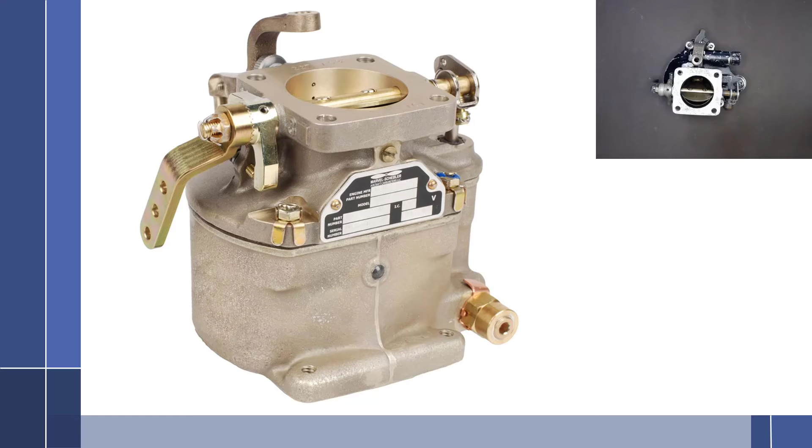In this video, I'm going to cover the Marvel Schebler MA-4SPA carburetor. This particular carburetor has the accelerator system as well as a manual mixture control, which all Marvel Scheblers do.

So let's get started. With any carburetor system, we can usually divide it up into two different circuits: the idle circuit and the off-idle, or sometimes called the main circuit.

So what we're going to do is start with the main circuit on this carburetor and go through all of the steps that fuel and air will take to get to the engine. So let's start at the beginning.

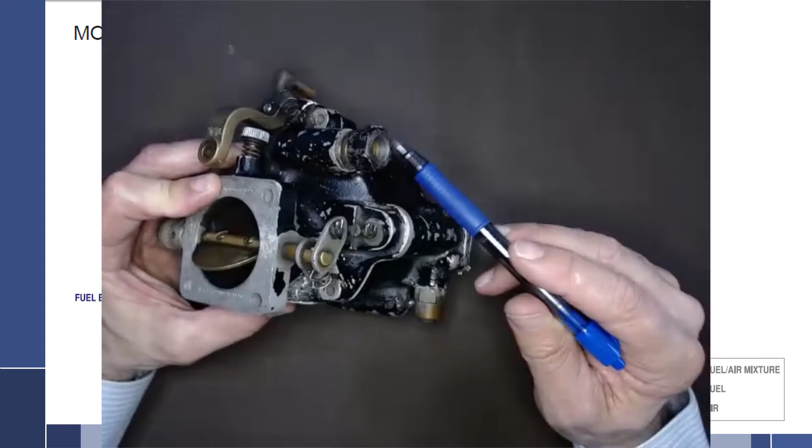Looking at the carburetor, fuel is going to come in through the inlet right here. Now on the inlet side, we notice there is a screen, a rather beat-up screen, but it's a screen nonetheless. Consider the fact that fuel is going to come this way, so any debris that the screen is actually filtering out will be on the inside. It will not be on the outside.

Now this screen is something that I would like to take a look at, clean and inspect at least every annual inspection or every 100-hour inspection. I would not let it go much longer than that.

Funny story, sometimes I'll ask students how often would you check that, and they'll say every overhaul. Well, that would be every 2,000 hours, or should be 12 years. But anyway, back to the carburetor.

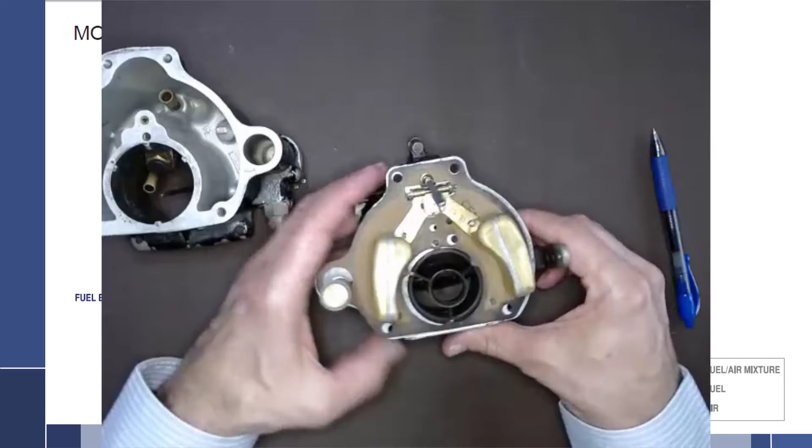So fuel is going to come through the inlet through this tube right here. Let's take the carburetor apart so we can now take a look at the inside of what is happening. So once it goes through this passageway, it is going to come to a needle and seat. I'm going to pull that apart here so we can take a look at it.

Remove the gasket, we'll set that out of the way. Here we have a needle and the seat down in here. So what happens as fuel enters in through the needle and seat, it will fill up the fuel bowl.

And when the fuel bowl fills to a very specific point, these floats, now it's upside down of course, will raise up until the needle closes off fuel coming in, and then the fuel will find its height.

The height of the fuel is a very specific and important level. The reason why it's specific and important, if we look at the drawing here, you will look at this fuel line and notice that this is where the fuel should be, and it comes to a certain point on the discharge nozzle.

So looking back at the carburetor, we can see here's the discharge nozzle, and the fuel needs to be at a certain height.

If the fuel is too high, then it is too close to the discharge end, and the carburetor will run very rich because more fuel is being drawn out than should be drawn out. If the fuel level is too low, then the carburetor is going to be lean.

It's going to run lean because the engine is not going to get as much fuel drawn out of this discharge nozzle that it should be. The venturi, I should say, will not draw as much as it should. And we'll cover that in just a second.

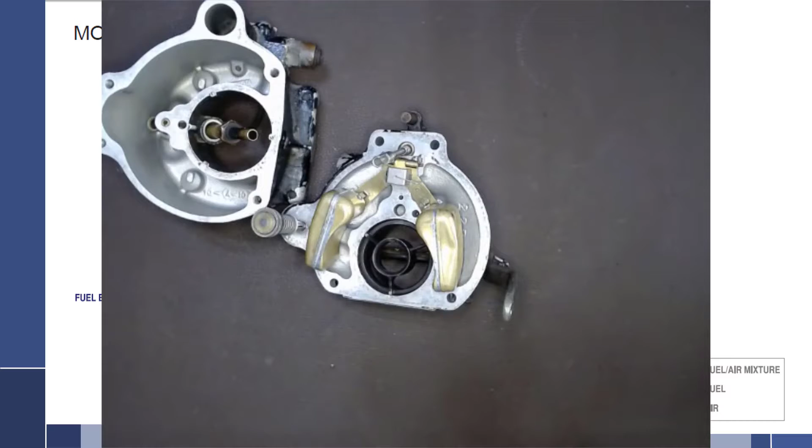Now let's talk about what is actually drawing fuel out of the discharge nozzle. Looking at the drawing over here, this is an updraft carburetor, which means air comes from the bottom of the carburetor up into the engine. In this particular carburetor, we have a series of venturis, a primary and a secondary venturi. We'll take a look at them over here on this half of the carburetor. It's actually one piece, but we name it that way.

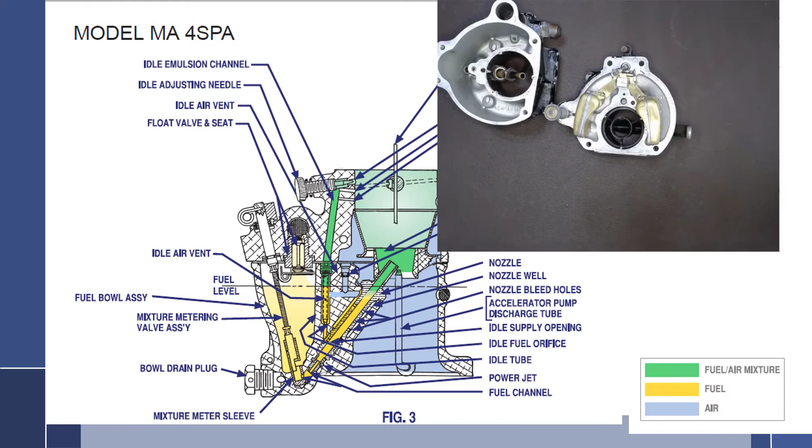The engine up here is running, and as the pistons draw back on the intake stroke, it draws in a rather large amount of air, and drawing in that air causes air to be drawn up through the carburetor, across the venturi, and into the engine. So the engine is sucking up the air right there.

Now, as the air is drawn through the carburetor, it goes past the venturis. Because of Bernoulli's principle, when air is drawn across a venturi, the air must speed up, and whenever air speeds up, we have a drop in pressure. So velocity increases, pressure goes down. Created within these venturis is a vacuum, and that is their job, is to create a vacuum.

In fact, these venturis measure the air going through, and the more air that goes through, the more vacuum there will be. Because there's a vacuum, it will pull the fuel right out of the discharge nozzle. So as less air is drawn across the venturi, there'll be less vacuum and less fuel will come out. The venturis are sort of the brains of the operation here. They measure the air and pull out the proper amount of fuel from the discharge nozzle to satisfy that quantity of air to operate the engine appropriately.

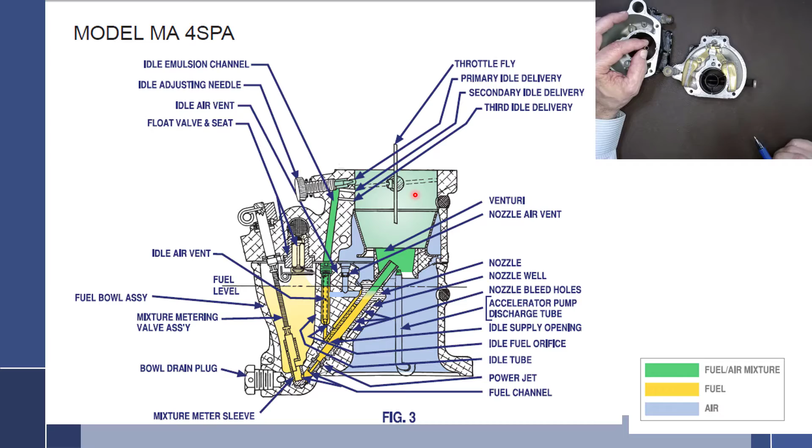So now we know what the venturi does, and we know why the fuel is now being discharged out of that discharge nozzle. We can back up a little bit and take a look at these holes right here. These are called air bleed holes.

Now, you need to mix air with the fuel that is coming out of the discharge nozzle. The reason air is mixed way back in here before the fuel even comes out is to help emulsify the fuel, get it ready to be evaporated, because we want evaporated fuel going into the engine, fuel vapor. Having these holes right here allows air to get into the discharge nozzle to emulsify that fuel, break it up into much smaller droplets. Smaller droplets have more surface area than one large droplet would. So it not only does that, but it helps the fuel come out in a nice uniform stream.

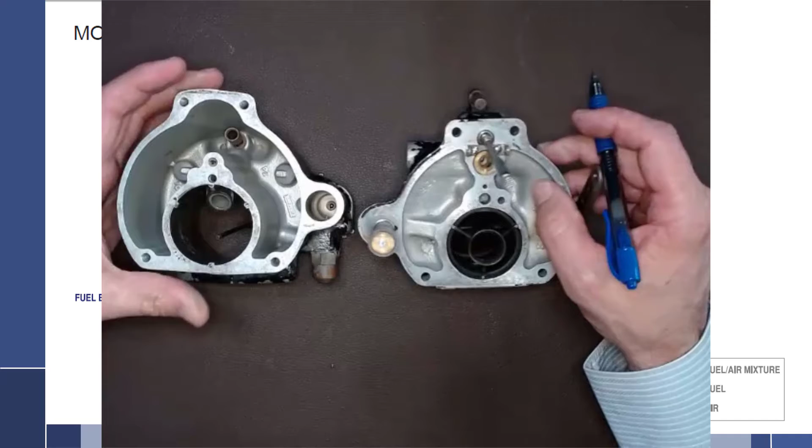So where does this air come from? That's probably one of the hardest parts about these carburetors, actually following the air path sometimes, but it's not terribly difficult when you take a little bit of time and look at it. So we're going to cover the air passageways of this carburetor. First thing we have to do is look at how air gets into the carburetor.

We already talked about the air for the engine coming across the air cleaner and through the air inlet chamber, right through this big hole throat right here, across the venturis, and then out into the engine. But we have a bunch of little passages inside the carburetor doing quite a few things. Number one, we need to vent the bowl right here, it needs to be vented to atmosphere. Number two, we need to get that air we just talked about for the discharge nozzle. So where does this come from?

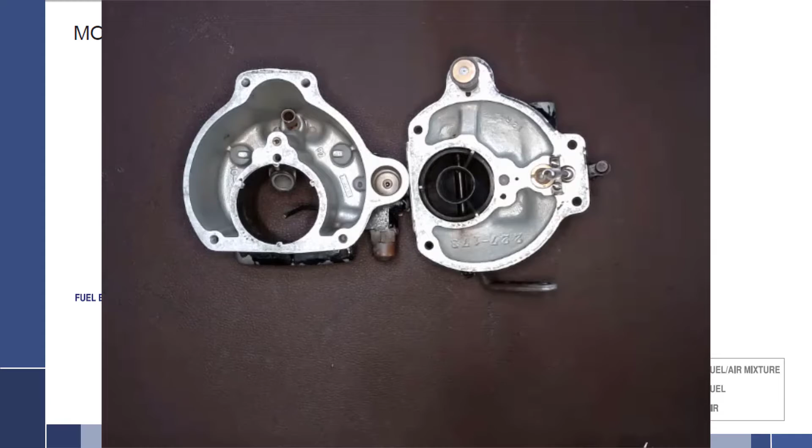Unlike the MA3 that we talked about in a different video, the air for this particular carburetor does not enter into this area right here. The MA3 has a little hole drilled into it.

This does not have that. So the only air going this way is going off into the engine. So where this particular carburetor picks up its vent air from is from behind this venturi.

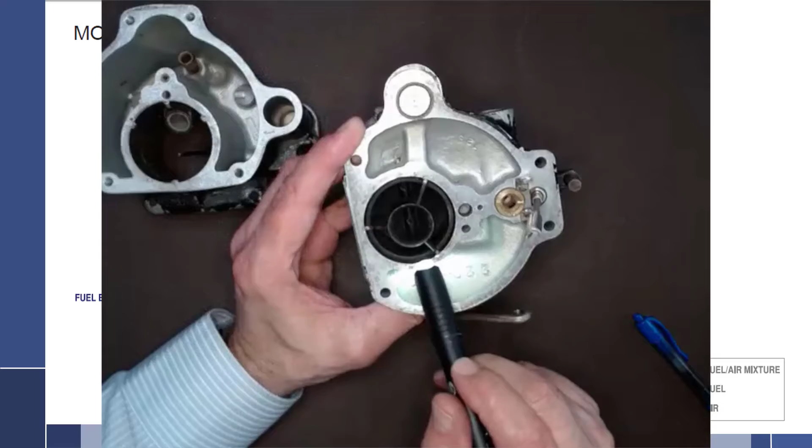Maybe if I hold a light right there it will shine through and the camera can see it, but I'll help you out. There is a hole drilled right here, and right down in here. And I'm looking for one more hole because I know we've got 3. And one more right there. So we have a hole drilled behind the venturi, here, here, and here.

Now, anytime you have a hole behind the venturi, what you're picking up, if we look at the drawing over here, behind the venturi is ambient air. So it's not suction air, it's actually closer to the ambient air. If it was suction, the pressures would be going the wrong way. It'd be sucking air out of the float bowl, and we don't want that. We want air in the float bowl to be equal to what is in the ambient air.

So we have these 3 holes drilled in here. This particular hole right here is going to go off to this hole in the accelerating system, which we'll talk about later. This hole right here vents the bowl, and this hole right back here goes into this chamber right here. This is the one we want to talk about right now.

Normally there's a little tiny screen right over here. I took that out for ease of explanation. What this particular passageway does is, maybe we can get a little light down in there. It has one hole going this way, and from this particular chamber right here, there is no other hole going anywhere. Unlike the MA3, which has many holes going down in there, this one is pretty much blocked off. Little screen, doesn't go anywhere. But air comes down here, goes into this chamber, and comes out of that. That's where the screen comes into play and corresponds to this hole right here.

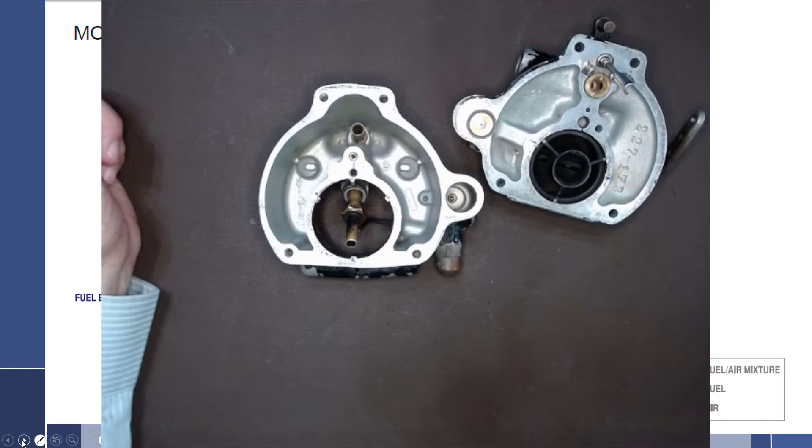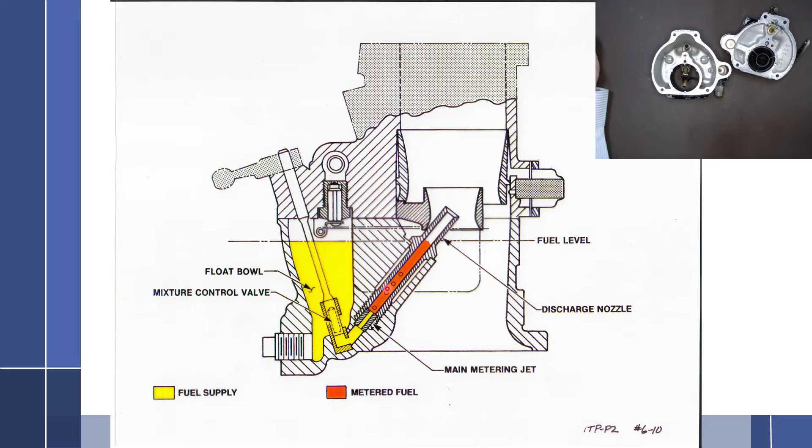So let's take a look at one more drawing over here. Here we go, this is somewhat of a simplified version. We have the float level, which we talked about as very important, being the proper level so that we don't get the fuel level too high or too low in the discharge nozzle. The fuel goes down through the mixture control valve, and then it goes up into that chamber. The very next thing it sees is the main metering jet, or in this carburetor they like to call it the power jet, but main metering jet, power jet, same thing. Then up into the discharge nozzle where air is entered into it. This drawing does not show the air being entered into it. Up and out the discharge nozzle.

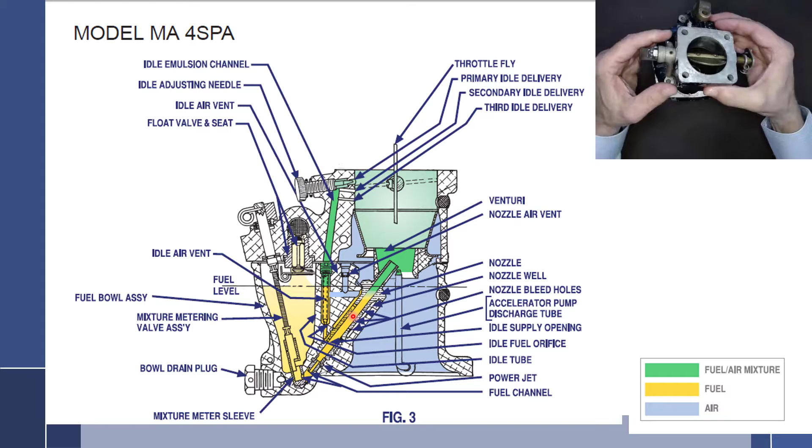All right, but now we can talk about the idle system. And let's start with why do we have an idle system? Why don't we just have one system? What's going on here? Well, what is going on with this carburetor, anyone like it, is this is idle right here, and this valve is closed. And when this valve is closed, there is only a little bit of air that gets in through around this idle valve. It is a very small amount of air that is coming through.

The air amount is so small that it's not enough to activate the venturis. There would be no suction across these venturis because of the little bit of air, and that means nothing would be drawing fuel out of the discharge nozzle. So we've got to do something different here - we need an idle circuit.

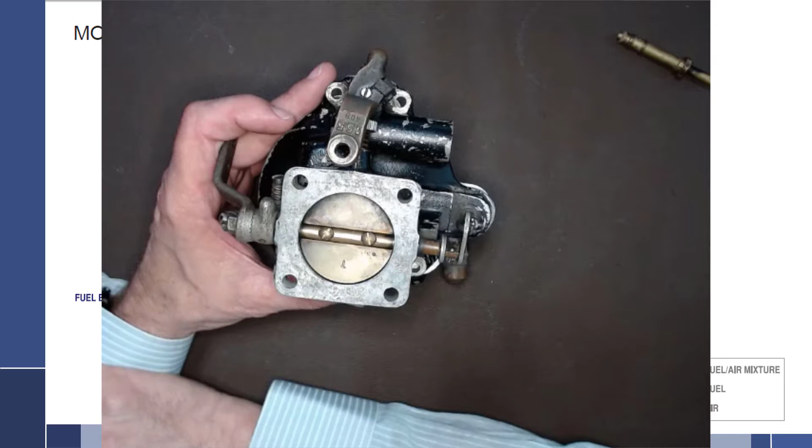The idle circuit depends on the fact that the pistons are drawing air in, working very hard to draw in as much air as they can. The smallest this carburetor would go on is something like a Cessna 150 with an O-200, about 200 cubic inches. So for every revolution of the propeller, 100 cubic inches of air needs to be drawn through these little tiny cracks, so you're going to have quite a vacuum built up on top of the carburetor.

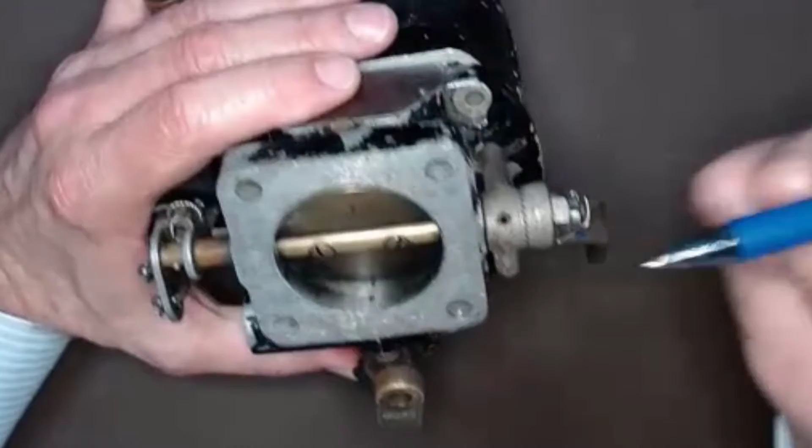Because we have this big vacuum built up on the top of the carburetor, we can use that vacuum to draw fuel out. Let me turn this around so the camera can pick this up. In the idle system there are 1, 2, 3, 4 discharge holes built into the carburetor that take advantage of that suction and draw fuel out of these little holes and into the engine.

So let's start at the beginning and take a look at what that's going to look like. Fuel comes in the same way across our screen, which we check every annual inspection or 100 hours. Then the fuel goes past the needle and seat just like before, filling the fuel bowl to that important, specific level. When the engine is operating, the floats drop down a little, allowing fuel to come out of the needle and seat, keeping the bowl at the proper level.

The fuel in the bowl goes down through the metering sleeve just like before, up this channel just like before, and through the power jet just like before. But it comes to these holes right here that are locked between these two threads. Because there are threads here and here, this particular part is isolated from the rest - the air in these holes is not getting to here. So this side is air, this side is fuel. The fuel goes through that power jet and then up from these holes into the discharge nozzle.

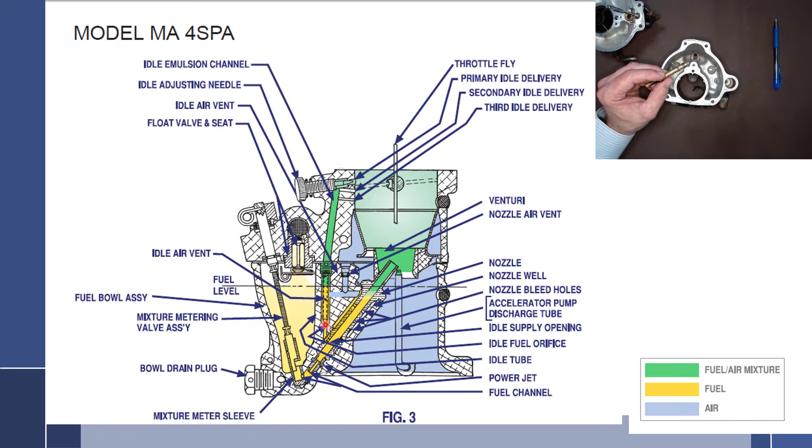Let's take a look at the drawing over here - you'll see the fuel did in fact come through the mixture metering sleeve, through the power jet, through the bottom threads and top threads. Right between the threads, there are some holes drilled right up into the idle tube, which is located right there.

Let's take this idle jet out and take a look at it. Here's our idle jet right here - and looking at this end, this is the idle tube, and this would be the idle jet. This right here is what limits the fuel at idle going up into the engine. Then we have another air bleed hole right there, which does the exact same thing as the air bleed hole in the main discharge nozzle - this one has its holes right there, this one has a hole right there, doing the exact same thing.

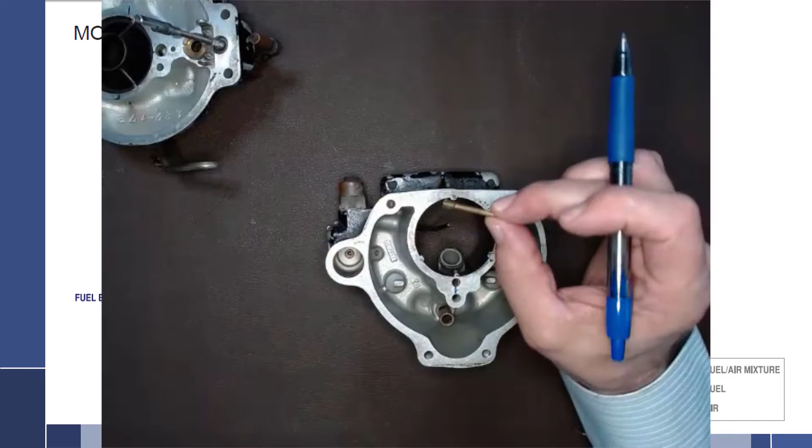Since we're talking about it, we can trace out where that air comes from - we already covered this. Going back to the top, there's a hole right back here behind the venturi. Air comes into this chamber through a screen, down into this hole, which is drilled down and back. So it's the hole going backwards that gives us the air for this hole here to help emulsify the fuel. From that point, it goes through this hole drilled almost all the way up to the top right here.

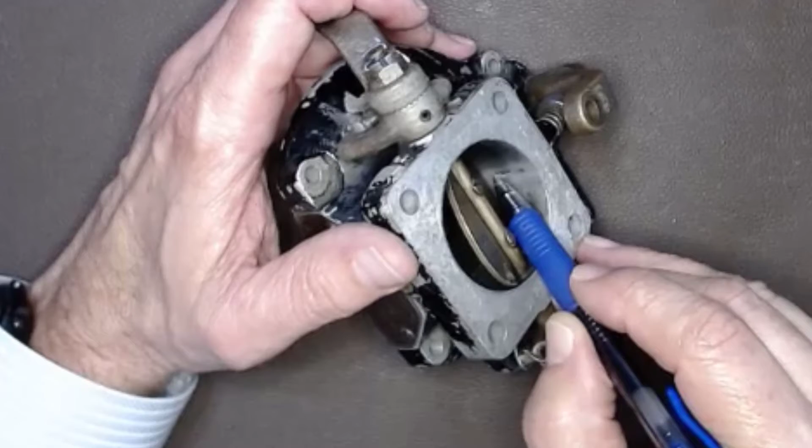So now it gets a little tricky to see in here, but we have 1, 2, 3, 4 discharge holes on this carburetor. Let's talk about why there are 4 and what these 4 holes are doing as the carburetor is operating.

At a very low idle speed, we're not going to need much fuel at all. Because we don't need much fuel, only one of these holes is uncovered. At this particular idle speed, with the throttle plate in this position, probably around 550 RPM, you're only going to get fuel out of this one discharge port right here, which is adjustable, and we will talk about that later.

Now, as we add a little bit of throttle, you're going to get a second hole. Because we've now added more air, we're going to need more fuel than this first hole would provide, so the second hole will now start providing some fuel. As we open a little bit more, the third one will open up because we have more air and need more fuel. Eventually we'll have enough air that we need that fourth hole opened up, providing fuel out of that fourth hole. So now all 4 of these holes would be providing fuel out to the engine.

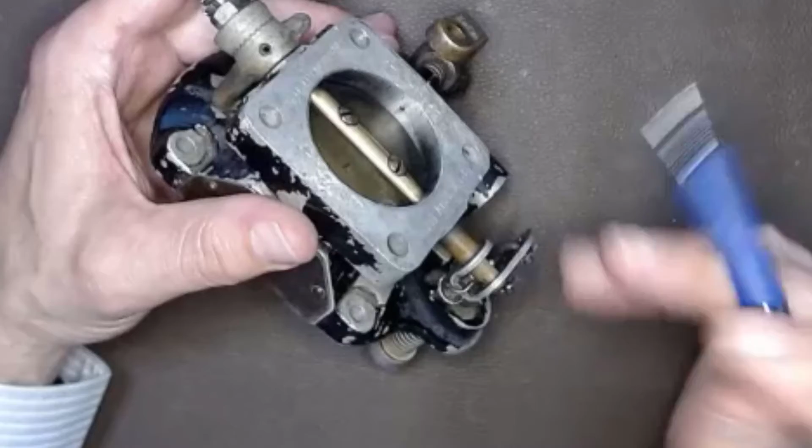But what's interesting, when we're back here at this very low idle and we have one hole right there, let's talk about what the other holes are doing, because they are now back here on this side of the throttle plate. Let's go to the drawing and take a look at that.

If we look at the drawing right here, you will see the throttle plate in the closed position, right there. And just like in our carburetor we just looked at, we can see that we have one port open, and fuel will be coming out of this one port.

Meanwhile, with the throttle plate in this position, these two, in our case 3 holes, are actually going to act as an air bleed, an auxiliary air bleed, because the air pressure in here is going to be less than in here, since this is under a vacuum now. Fuel is being drawn out through there right there, and so it's actually going to pull a little bit of air in through this one — in our case a third one — acting as additional air bleeds.

Then when the throttle opens up a little bit more and uncovers, say, the top 2, the bottom 2 are going to act as air bleeds. So whatever's below the throttle plate is going to act as an air bleed because of the way the air pressure is, and whatever's on top is going to be a discharge nozzle. It's going to work that way until the throttle opens up far enough that all 4 of them, in our case, are uncovered.

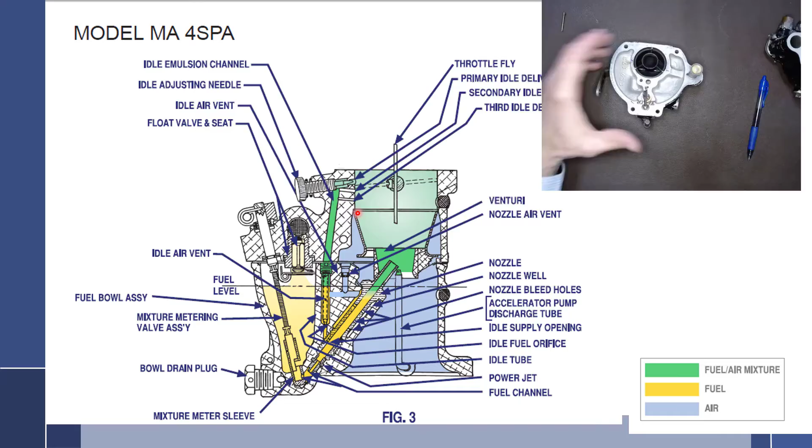At that point, once 1, 2, 3, 4 are uncovered, the throttle plate is going to be opened up enough that enough air is coming through the carburetor that by that time, the venturi is quite probably going to be efficient enough that it's going to start drawing at least a little bit of fuel out of the main discharge nozzle. That is the transition period.

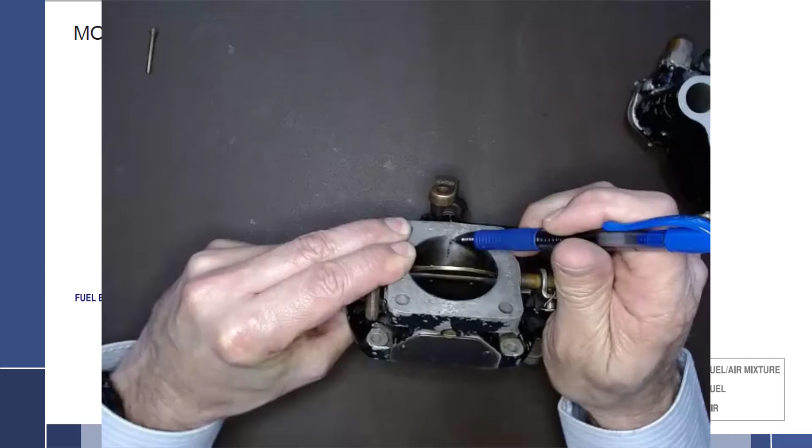So it's transitioning off of the idle circuit onto the main system. As the throttle is opened further and further, the 4 discharge holes for the idle circuit will become ineffective because there isn't enough suction here to allow those to operate, and everything will be riding on just the main discharge nozzle at that point. So that would be the idle circuit.

All right, we're doing pretty good here. We've covered both the main circuit and the idle circuit, both fuel and air passages. Now we can talk about our mixture system.

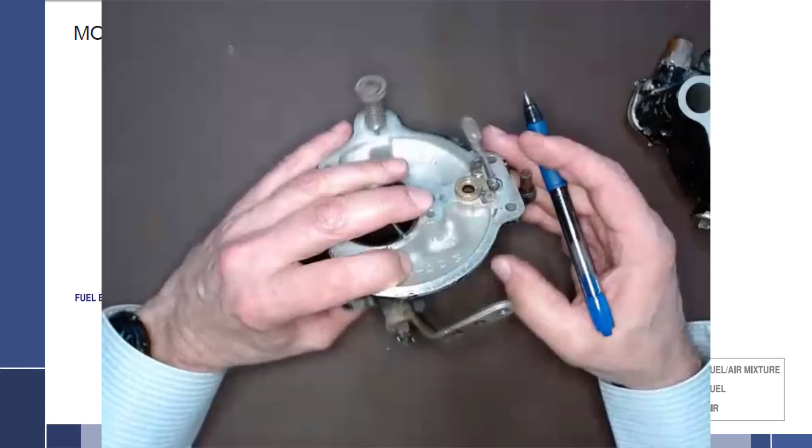This particular carburetor, as well as actually all Marvel Schebler carburetors, works off of a valve. This is the mixture rod right here that just rotates with this arm right here. In the cockpit, when we pull it back, we pull to idle cutoff, as it's called. It's a bit of a misnomer because it will cut off the fuel no matter what speed the carburetor or engine is operating at, but we call it idle cutoff — it'll cut it off at full power if you pull it back far enough. Then we push forward in the cockpit, and that would be full rich.

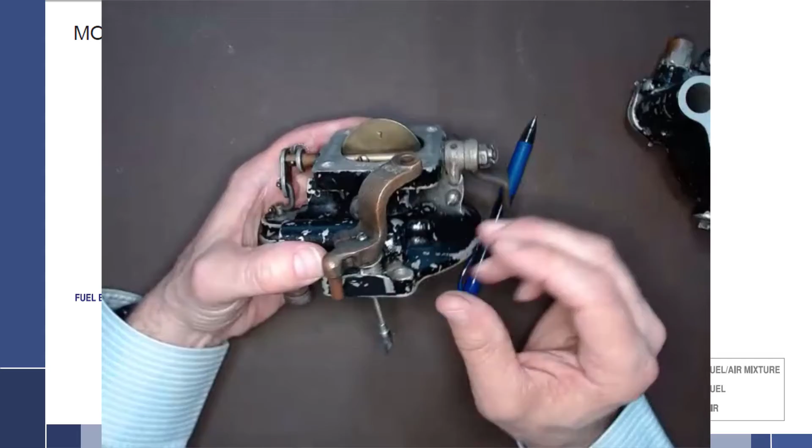So we have rich and idle. What's happening is this rod goes down into a sleeve, and as we looked at earlier, the fuel passage goes through a slot cut into it. At full rich position, the sleeve is oriented into this slot so there is no restriction whatsoever.

It's wide open. But as the carburetor is pulled into lean, this closes off a little more, until the amount of fuel going through the sleeve is less than the amount the jet is restricting. So this restriction gets smaller than that one, and down here starts doing the metering rather than the jet.

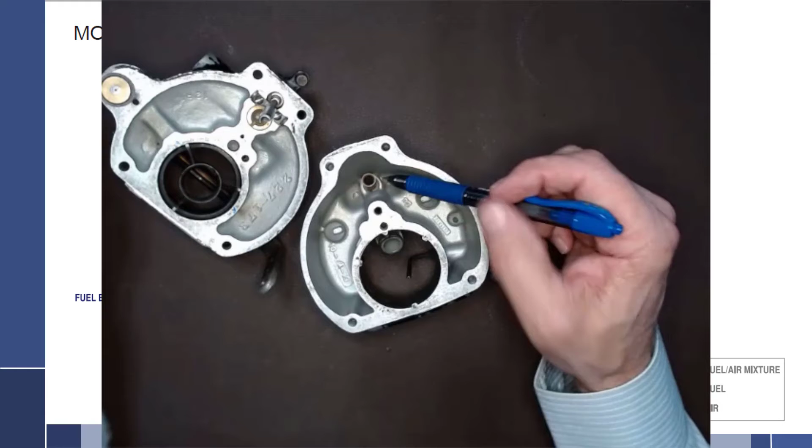Once the sleeve is doing the metering, it's effectively like making this smaller. As that gets smaller and smaller, the carburetor gets leaner and leaner until, if pulled back far enough, it closes this off completely and the carburetor shuts down because no fuel goes through the metering sleeve to any of the orifices for the engine. That's why it's called a cutoff.

That is actually a very simple system. Occasionally you may run into a problem where a carburetor has been recently worked on, put onto the engine, and run up, and when you pull this into the lean position, the carburetor just continues to run as though nothing happened. Well, that's because nothing did happen.

It's very easy to misalign these, so that this rod actually ends up somewhere over here instead of into the sleeve. So when you assemble this, you have to be very careful to make sure it actually makes it into the hole, because it's on a flexible shaft. It's easy to miss on that one.

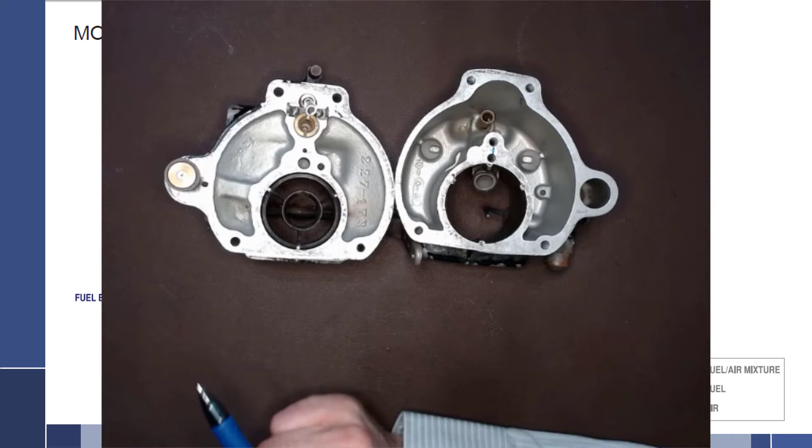So that's the mixture system. Now, this particular carburetor does not have an economizer system, so that makes it real easy—we don't have to talk about it. If you're interested in the economizer system, take a look at the video on the MA3, because that one does have the economizer, or as some would say, power enrichment system.

But this one does have an accelerator system. When you operate an aircraft engine, it's always a good idea to move the throttle gently and carefully. You should not be jazzing the throttle like it's a car, because our aircraft has a big propeller up front that sets up bad vibrations. They don't like it. We have dynamic balancers inside the engines, and they don't like it either. So everything is done nice and gently and smooth.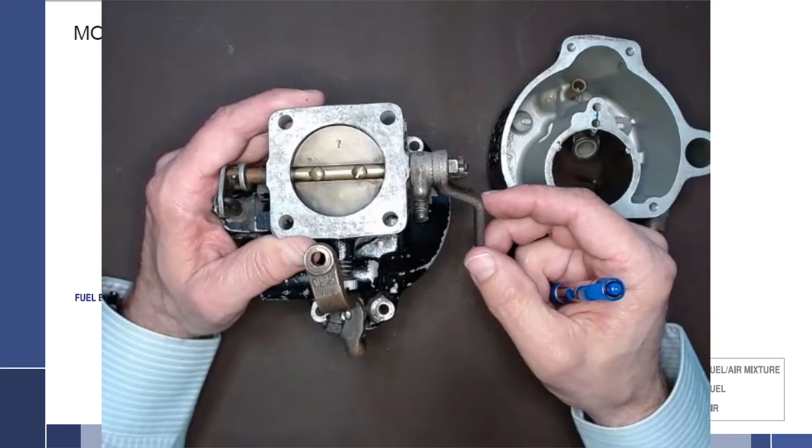But there are occasions as a pilot when we get very excited and hit the throttle a little too fast—something runs on the runway, or you need to add power suddenly because you got too low, too slow. If you open the throttle too fast from an idle, it didn't transition and the engine could stumble. That would really get your attention and quite possibly mess up the seats, so that's not a desired effect.

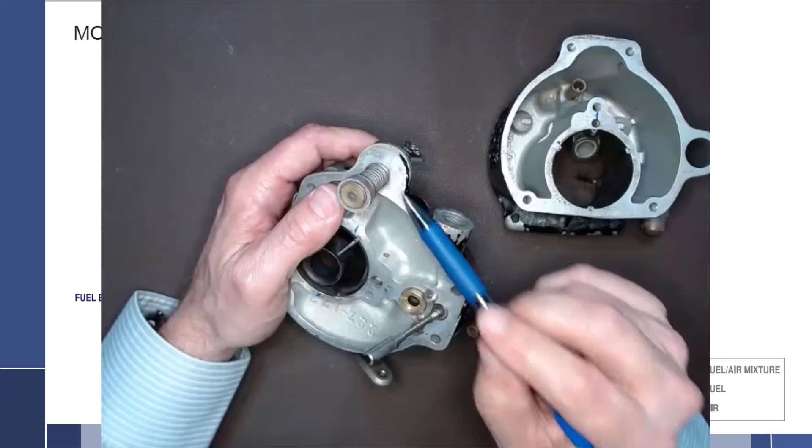So on this particular carburetor—not all of them have this—there's an accelerator system. As the throttle is advanced rapidly, it gives a shot of extra fuel through this nozzle right here, this little one hanging out there. Let's take a look at how this works.

It's actually quite simple. We have fuel in the bowl, obviously, because that's how the carburetor is operating. And over here we have a plunger assembly. You can see when I operate the throttle, there's closed. If I operate the throttle, it pushes this plunger down, and when I close the throttle, it pulls it back up.

So inside here there is fuel, and there's a hole that goes through a check ball valve. Underneath this there are some little BBs, if you will, and there's another check ball over here—so a one-way check. This one allows fuel to go this way, and this one allows fuel to go that way. As the plunger is drawn up, this one closes off so air isn't drawn in through here, meaning the only way anything can get through is this hole right here.

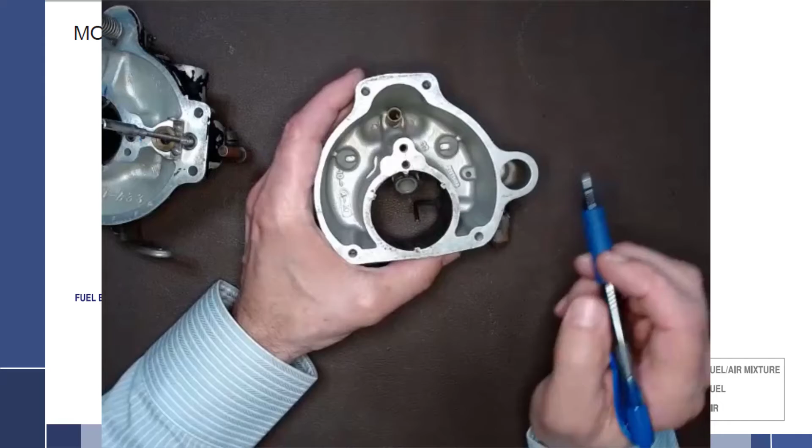As the plunger is pulled up, fuel is drawn through this hole across a check valve and fills up the chamber. That's where we would be in an idle position. When the throttle is advanced, the plunger pushes down. It closes off the check valve on this side so fuel cannot come back out into the bowl, because that would be pointless. And this check valve opens up, so fuel is allowed to pressurize through here, come through this check ball, around through that casting, and up through this discharge nozzle and spray into the engine.

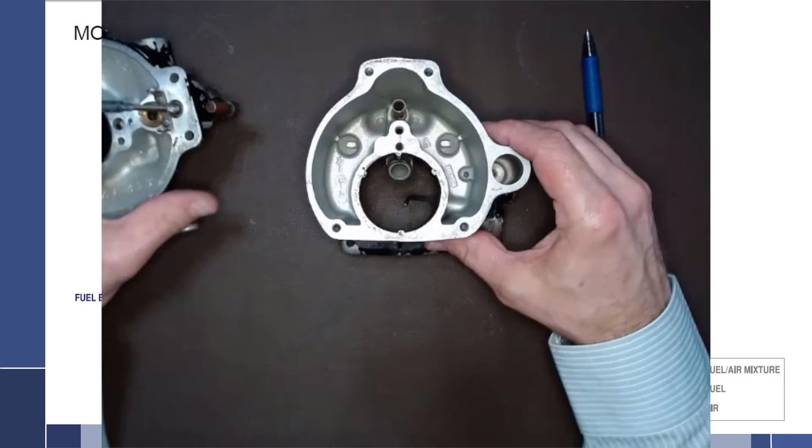Now there's a few other nuances about this. Number one, this chamber right here must be vented. We looked at this before. There's a hole right back here on this side behind the venturi that's drilled right through here to here. That's how this part is vented with air, so when the plunger moves up and down, you can have air on the back side instead of it being airlocked and not able to move well.

Next thing you'll notice, there is a spring on here, and I can compress that spring. What that spring is there for is, imagine you had to open the throttle very rapidly and there is fuel in here. Without the spring, the fastest you could open up the carburetor would be as fast as you can push the fuel out of that little tiny hole. And if that little hole got plugged for some reason, you wouldn't be able to advance the throttle fast at all. So this allows the pilot to advance the throttle rapidly and the spring to catch up if that's what needs to happen. It gives you some play to open the throttle quickly and then let the plunger go.

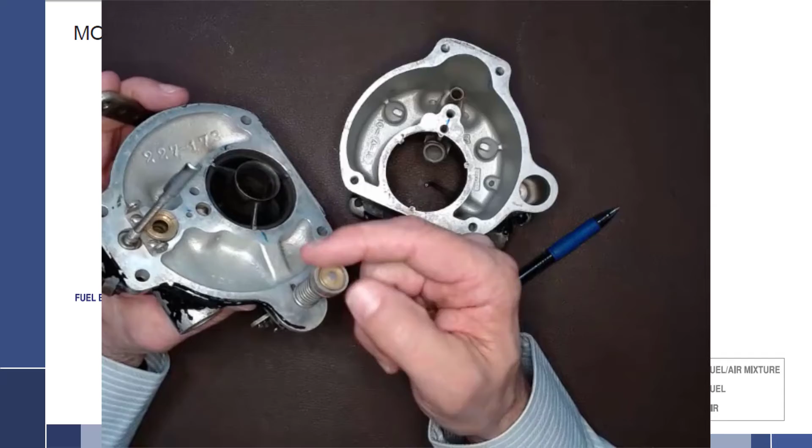The plunger is made of leather. They should be lubricated, and this one is actually in very good shape. Make sure there's a little bit of lubrication so when it goes into this chamber, it doesn't roll and catch.

There are adjustments over here that allow you to adjust how much fuel you get for the acceleration—a small, medium, and large amount of fuel. So that covers the acceleration system quite well. That's really all there is to that.

All right, let's move on and talk about adjustments on this carburetor. The Marvel Schebler carburetors are very easy to set up once you understand what it is you're doing, the results that you want, and why you get those results.

So let's just assume it's either a new engine or a new carburetor we're putting on. It's going to have some settings done by whoever overhauled or built it. Usually the idle mixture adjustment screw is turned all the way in and then out 1.5 turns. That's a good rule of thumb to start—half, one, one and a half—so 1.5 turns out is a good place to start.

So we're going to bolt this all up to the engine and attach the linkage here to the cockpit. This screw right here is the idle speed adjustment screw. We only have two adjustments on this carburetor: idle speed and idle mix, so it's not terribly difficult to set up from a mechanic's standpoint. Now if you're overhauling these, you also have to set up the float bowl, but that's not hard either.

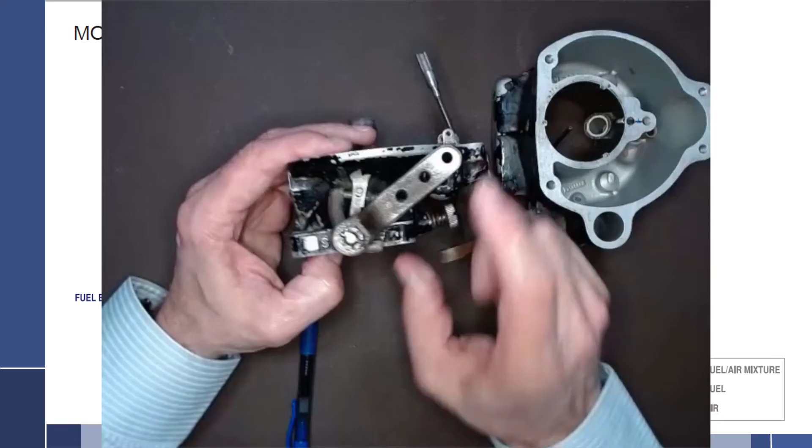So to set this up, once it's bolted to the aircraft engine, I like to make sure the idle mixture is out 1.5 turns. Then I take the throttle stop—this is what adjusts your idle speed. It provides a stop to dictate how far this plate will open or close. So if I were to screw this in, it opens the plate more, we get more air coming through, and we get a faster engine.

I don't want it interfering with what I'm trying to do, so I tend to back it out so it's really not in play. Then I go into the aircraft, start up the engine, and warm it up.

It's very important that we do all adjustments on a warm engine. Yes, it could potentially idle way too slow, but I'll just control that with the throttle in the aircraft. I'll open it up until it idles at the speed I'm happy with, and I'll warm it up.

Now, once the engine is completely warmed up, the first thing I want to do is check the idle mixture. That's what we're going to set first. The way that's going to happen is we are going to pull this into lean.

So let's take a look at this here. That would be rich and that would be lean. So we'll call this our rich position, and we'll call that our lean position. Here we go, we're in rich, full rich.

So we're running the engine in full rich and we've warmed it up. I'm at idle speed, and I'm going to pull this to idle cutoff. Remember, it will cut the fuel off at any speed, but we call it idle cutoff. I'm going to watch the tachometer and listen. If it's adjusted correctly, we should get about a 50 RPM rise and then a die, then it just dies suddenly. So what's happening? Why are we getting that 50 RPM rise?

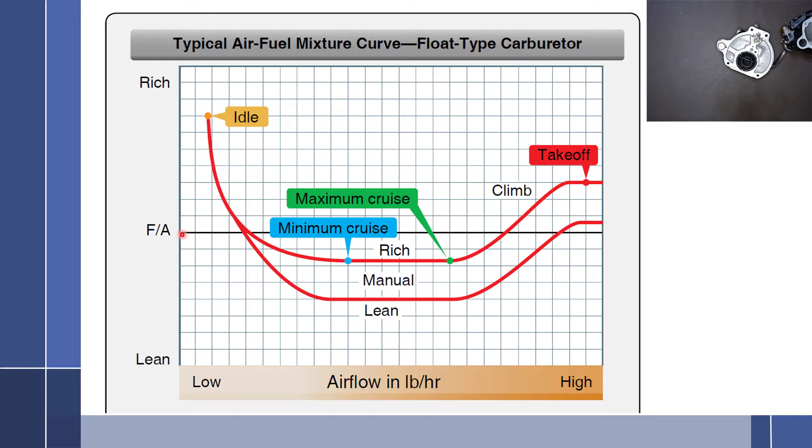So going back to setting up our idle speed, if the engine were running and we were adjusting the idle mixture - by the way, I don't recommend adjusting this while the engine is running because you could get hit by the prop, and that would ruin the prop and your day. If we could adjust this while running, we could get it to a point where screwing it in leans it out, because there's a little needle that closes off that top passageway.

We screw it in, that leans out the engine - it starts running slower and slower. Then as we back it out and richen it, it runs a little faster, a little faster. Then it starts running slower again because we're getting too rich. So the perfect spot for idle mixture would be to turn it in until it got to its best, highest RPM, then back it out so it slowed down about 50 RPM.

Because we don't want to adjust this on an operating engine, and because we have the idle cutoff, we can do this from the safety of the cockpit. So we set this at 1.5 turns out initially - all the way in very carefully, then out 1.5 turns. We'll operate the engine, get it warm, then pull this to idle cutoff. When we do, we should see the engine rise about 50 RPM and die.

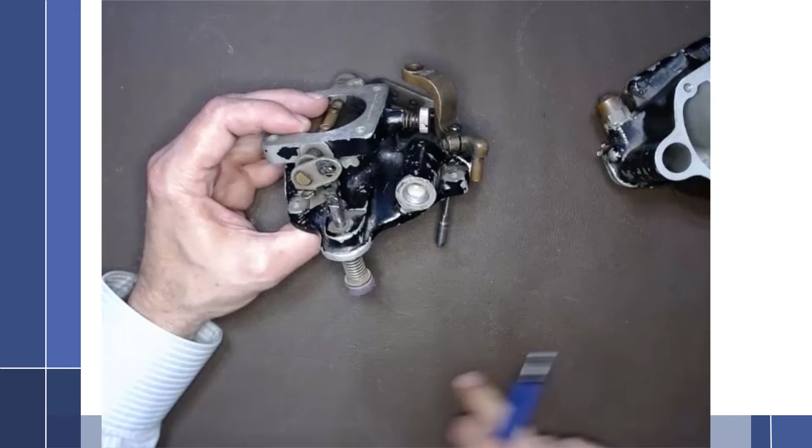What happens is, as we shut off the fuel, there was still enough fuel in the passageways to operate the engine for a few seconds. It went from being a little overly rich to perfect mixture to super lean, to die - it happened that fast. So if we get that little 50 RPM rise, that indicates we're 50 RPM to the rich side of a perfect mixture, and that's where we want to be.

If we warmed up the engine, pulled this back, and got 50 RPM rise, we're perfect, we're done. But if we pull it back to idle cutoff and see a 150 RPM rise, what does that indicate? That indicates we're way too rich - it was running so rich that as it extinguished the fuel, it went from way too rich to perfect, a 150 RPM rise to a sudden die. We'd have to close this off a little, maybe a quarter turn, and run the engine to see where it goes from there.

Now what if we pulled back on the mixture and had no rise whatsoever? That means we were already on the lean side of things, so we'd need to enrich it a little - turn it out, opening the needle into that hole. We back it out a little until we got that 50 RPM rise.

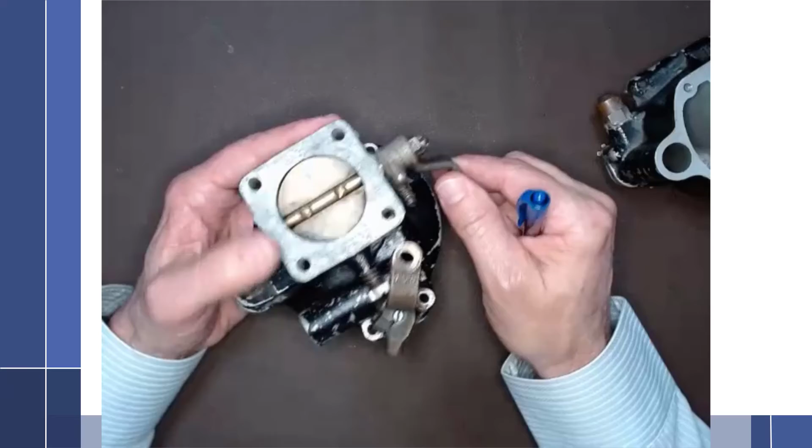What happens if I turn it out and out and just don't get any rise whatsoever? Something is wrong. With these particular carburetors, what tends to happen is there's a bushing and no seal where this throttle shaft goes on this side. So they tend to get a lot of play right in here. When you have a tremendous vacuum pulling right here, it's trying to pull air from wherever it can, and it will pull air and fuel from around the plate right here.

It'll pull it out of the discharge nozzles there, and it will pull it from around the bushings right here that are all worn out. So that is air leaking in across those bushings instead of fuel, and we have way too much air, not enough fuel. Backing this out doesn't help because the leak is too bad. Or maybe we have a leak right here in the gasket, or a different induction leak somewhere else. But that usually means there's an induction leak if you cannot get that rise out of there.

So anyway, that's setting up the mixture. Remember now, we backed this one out, so we ran the engine, pulled it into idle cutoff until we got that 50 RPM rise. And once we got that, we know this is set perfect. And by the way, this will obviously affect the speed of the engine. We just talked about that.

So if I set it at a perfect spot and I'm idling at 500 RPM, but it's really, really lean and it's running at 500 RPM, as I back this out, it's going to enrich it, and I should see the RPM go up and up and up, remember? And then it'll start to drop back down once I go too rich. So this will affect the engine RPM. It's not how we set RPM. Make sure you get those two straight.

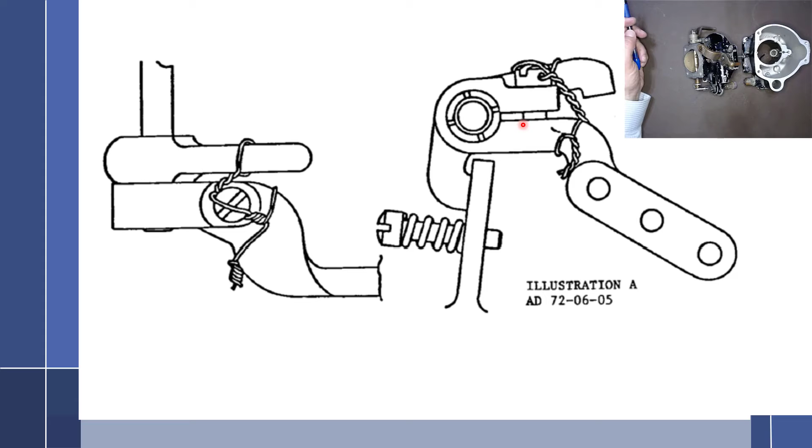So when you produce a part, we'll look at the carburetor, there are places where screws need to go, and that area needs to be flat. This area right here where this gasket goes and it clamps to the engine needs to be flat. Where this screw goes needs to be flat. So there are places that need to be flat. The casting is made and they're kind of rough, and then they are flattened out. Well, how they do that is right here. This is milled flat, and they take a mill. A mill is like a cutter that goes on something that looks like a drill press. A mill is a drill press where the table can move around.

So they will take a cutter and mount this into the table, and then the cutter can go back and forth and mill that flat. Now something that is spot faced, and I'll use my flashlight right here, is where the cutter just came down and touched it and backed off. It didn't run across something, it just came down, touched it, and left. So that would be a spot face. This would be milled flat.

So what we're looking for, and we can now look at this drawing right here, do you think this particular drawing was spot faced or milled flat? Now, to me, if it was milled flat, they would have cut it all the way across like that. That would have been milled flat. So I would say this drawing is definitely something that is spot faced.

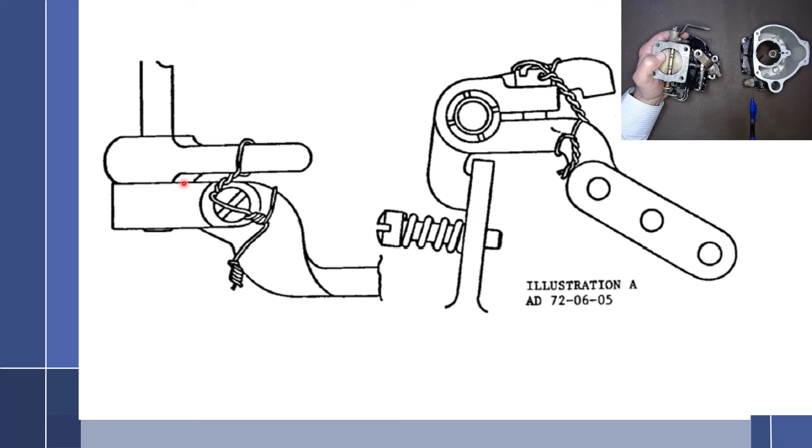Now look at it over here. You can see the cutters are round and it came down and just touched it in one spot. Boom, that right there is spot faced. And if it went all the way down here, that would be milled flat. They actually moved the table, or moved the part underneath the cutter. So milled flat versus spot faced.

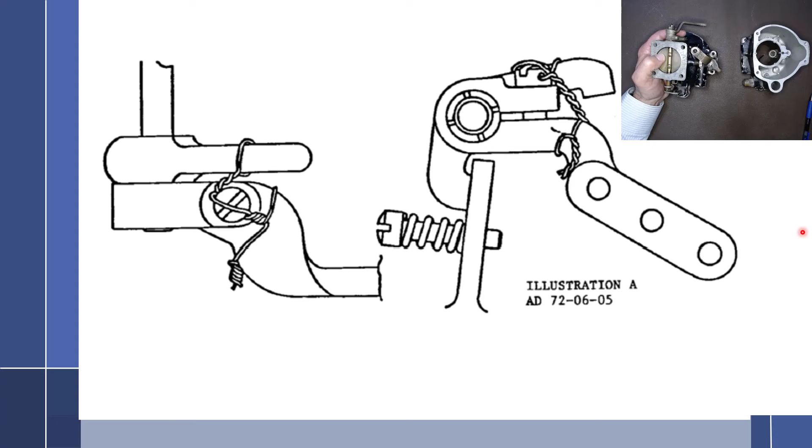And the airworthiness directive does say, determine whether it has a spot face or milled flat for the head of the clamping screw. Replace any arm having a milled flat with one having a spot faced flat. So you want the spot faced, not the milled flat.

Now, given that information, we're going to look at this right here. The first thing you should notice is that drawing looks absolutely nothing like this arm right here. And that should draw some red flags to you right away. What has happened is this is the newer style throttle arm to prevent what was happening with the other one.

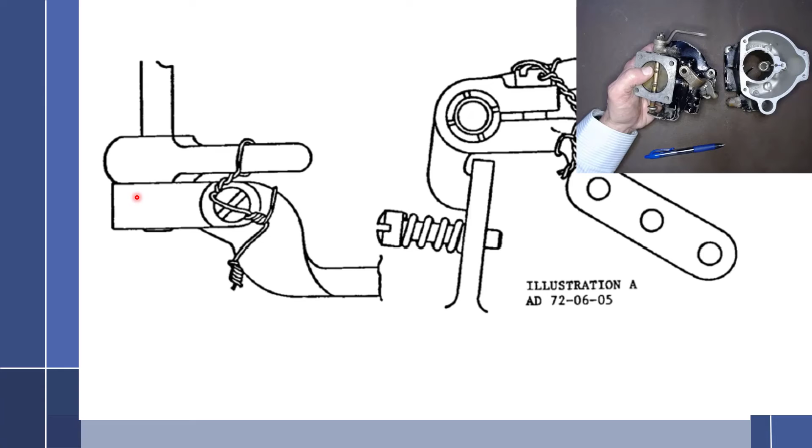With the old system, if you look at the drawing, you can see how they want you to safety wire it in a very specific way, because these two pieces were only held together by the clamping action of the screw. What could happen is this lever right here would move independent of this stop right here, which is pinned to the shaft. So the part that's pinned to the shaft would not be moving with the throttle arm. And that'd be very, very bad if the pilot's asking for more throttle and it's just slipping on the shaft.

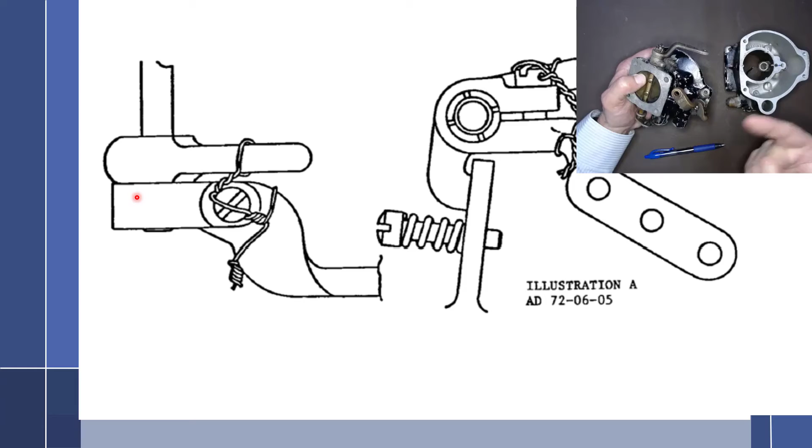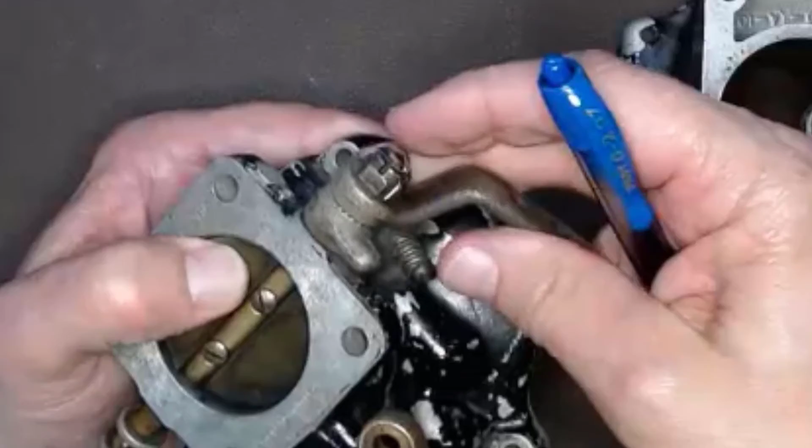So the solution was to create this style of arm where there's these little serrations and this locking nut right there. Once you engage these serrations and lock that nut down, these two things are not going to move at all, especially with that cotter pin being there. So this particular style arm is not part of the airworthiness directive.

So if I were looking at a carburetor and I had to deal with 720605 R2, I would write in my logbook that I inspected it and found that the throttle arm is not the style that is mentioned in the airworthiness directive. So there we go: spot face, milled flat, and the serrated throttle arm.

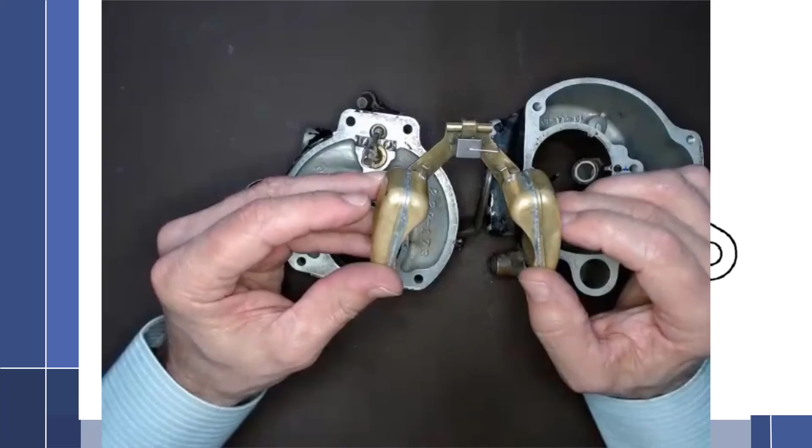The next one I want to talk about is 93-19-04, and that deals with floats. With the floats, there was a problem, and they said that you are supposed to inspect these floats for the part number CF30766. Now, it just so happens that I grabbed a float with the part number CF30766.

And the point I would want to make here is a lot of people make the mistake of seeing 30-766 and don't realize that the CF is in fact part of that part number, because these floats are made by several different manufacturers. One manufacturer put CF30766, another manufacturer just had 30766. So be very careful and note that the CF is in fact part of the part number.

So if these floats only had the 30-766, and the AD said look out for the ones that say CF, then this one would be in compliance. But again, a lot of the floats don't have the CF, which means it doesn't apply to them.

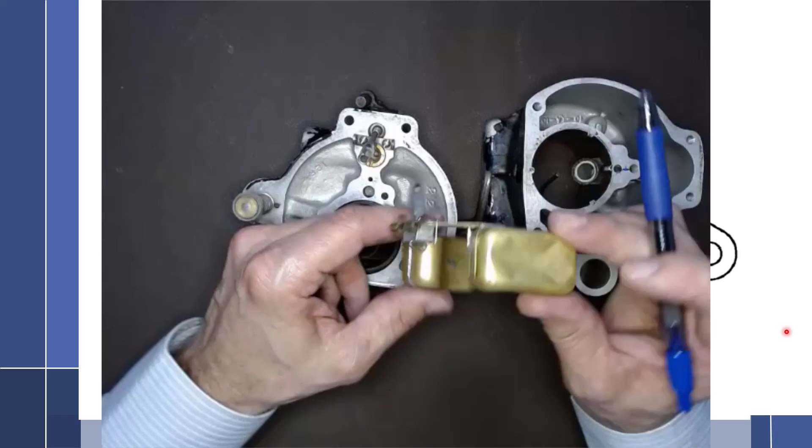And while we're talking about floats, there have been a progression of floats in Marvel Schebler. There was some black composite floats, there were these metal floats, there were white plastic hollow floats, and now there are blue composite floats. So the problem with the first three, the black composite, the metal floats like this, and the white plastic floats, is that the black ones, I believe, had a problem with disintegration in certain types of fuel. These particular floats, you can see this one is crushed. They're very, very fragile and easily crushed with too much pressure or mishandling.

Not only that, they're prone to getting little tiny pin leaks in the solder joints. You can test them out, make sure that they work, and put them in service, and these little tiny pin leaks will leak so slowly that it will eventually fill up and the float will sink.

Well, what happens when a float sinks? That means this needle is not going to be in the seat, and that means the carburetor will overfill, go over rich, and potentially cut off the engine because it's too rich. So very bad thing to have happen.

I guess the best case scenario is it sinks and leaks fuel all over the floor, and you'll have a gigantic mess when you come into the hangar the next day. That could lead to a fire, which would be the next worst case scenario, I suppose.

All right, so all of those floats leaked. And in fact, it's interesting how they will fill up full of fuel even though they test fine. You can't even find the leak. It won't come out. You can just shake it and hear fuel rattling around in there, and you wipe it off and it seems fine, but it's not.

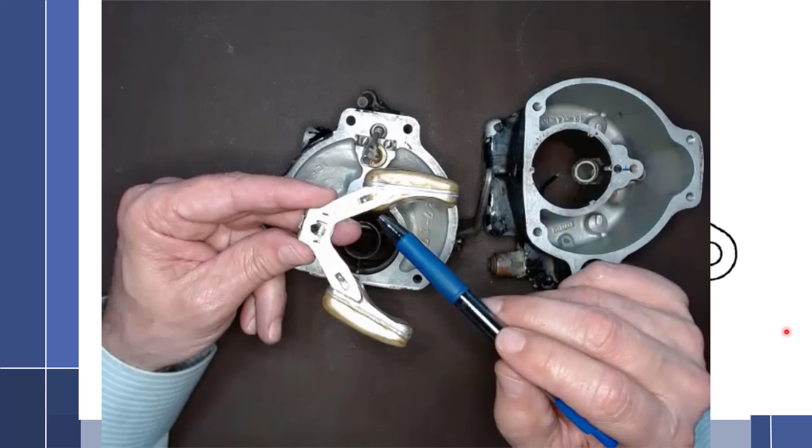Now the blue composite floats, they're not hollow, they're a composite. In fact, they're so well made that even if one broke off, the other one is buoyant enough that it will actually operate properly. So the point is, if you open up a carburetor and it has this style of float, you need to replace it with the blue composite floats.

And the second point was be careful of part numbers. The prefix on the part number is part of the part number. And the last AD that I want to mention here, just because it's a little confusing for some people, had to do with the Venturi.

That was 980106. What happened is when these carburetors were originally made, these Venturis were in two pieces. There's a primary Venturi and a secondary Venturi, and the secondary is pressed into the housing. Then you would take the smaller one and press that in, and there would be little clips at all three of these little legs.

What happened is, because it's not really held in with a lot of pressure, this particular Venturi would get loose. And when it got loose and started rattling around, it was subject to falling out and being ingested into the engine, which is a very bad thing.

So what the AD wants you to do is either inspect these periodically, I believe it's every 100 hours, or replace them with a one-piece.

Well, this AD came out 26 years ago. So for the most part, most of them have been swapped out from a two-piece to a one-piece, because it's labor intensive to take the carburetor apart every 100 hours and verify that the Venturi is not loose in there. But there are some people who preferred the two-piece Venturi, even though it was labor intensive to continue to inspect them.